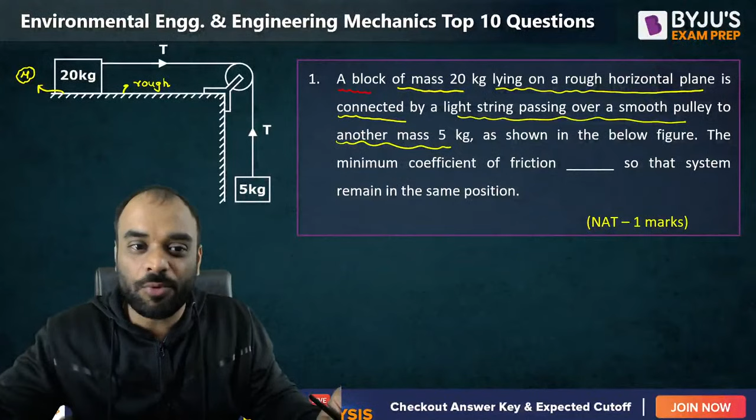That is the question, only 1 mark problem for this particular question guys. This is based upon the friction force and you need to draw the free body diagram for both the masses. Then only you are able to solve this type of problem. So let's do it guys quickly.

So this is the mass 5 kg for which we have to draw the free body diagram first. This is the 5 kg weight, so mg should act in the downward direction. Very nice Deepak. So 5 into, let us consider 10 as the gravitational constant. And T is nothing but our tension. So T is equal to how much? Can we write here, summation Fy is equal to 0, that is our static equilibrium equation. So T minus mg is equal to 0. So T is equal to 50 Newton. Correct? T is equal to 50 Newton.

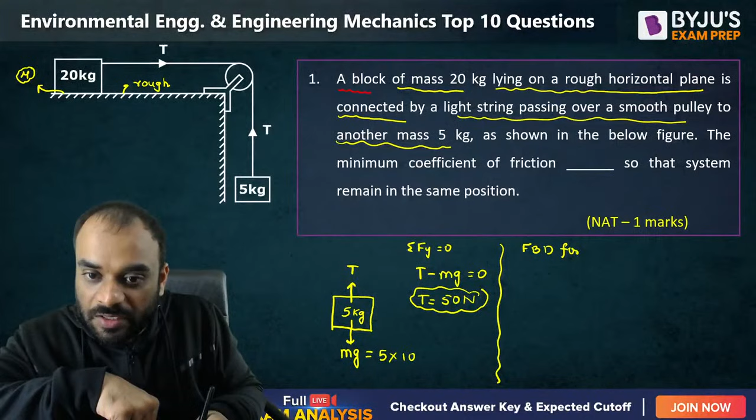Now guys, we need to draw the free body diagram for this particular 20 kg mass also. So FBD for 20 kg mass, let's draw it. So this is 20 kg. This is only a 1 mark question, the next one is 2 marks.

So it is equal to how much? 20 into again 10, and then we have a normal reaction like this, and this is our tension force. Now you know guys, the friction force will act in the backward direction because the block is trying to move in the rightward direction. That's why, very nice Rishabh Pant. So what will we write here? Summation Fy is equal to 0, and N minus 20 into 10 is equal to 0. So N is equal to how much? N is equal to 200 Newton. Correct? Okay, then we have to write summation Fx is equal to 0.

That means T minus Fr is equal to 0, so tension is equal to the friction force itself. Now the value of T is how much? We have already calculated it, 50. So 50 is equal to Fr, and Fr can be written as mu into N.

What is the value of N? It is 200, right? So mu into 200 is equal to 50. Kindly calculate this value of mu, how much it is coming around? 0.25. Very nice, it is coming around 0.25, and this is our answer.

So this is the minimum coefficient of friction which is required below 20 kg so that the system remains stable. Very nice guys, only 1 mark problem for this type of question. Okay, very nice Deepak, very nice Rishabh Pant.

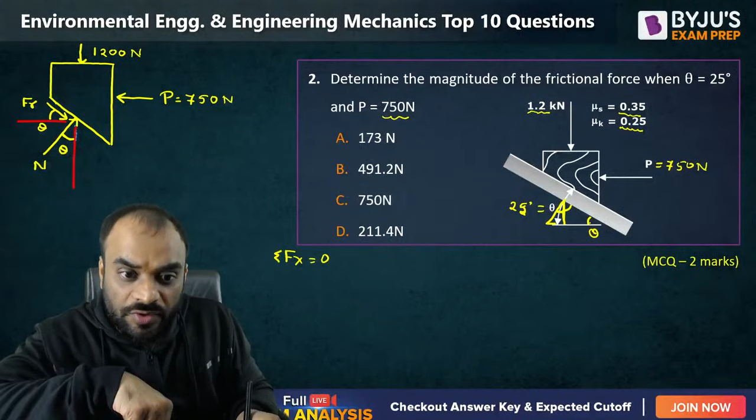Now guys, let's write down the equilibrium equation, static equilibrium equation. So summation Fx is equal to how much? It is equal to 0. So we can write here Fr cos 25 degrees - this angle is 25 basically, and this angle is also 25 degrees, correct? So Fr cos 25 degrees plus N sin 25 degrees minus P is equal to 0.

So what is the value of cos 25? Cos 25 degrees is equal to 0.9063. So 0.9063 Fr plus sin 25 - sin 25 is equal to 0.422 - 0.422 N, and it is equal to P. P is equal to 750 Newton. So this is our equation number 1, which we are getting.

Now similarly guys, we will write summation Fy is equal to 0. That means minus 1200 plus N cos 25 degrees minus Fr sin 25 degrees, which is equal to 0 again. So N cos 25, that means 0.9063 N minus FR. FR is equal to how much? We need to calculate it.

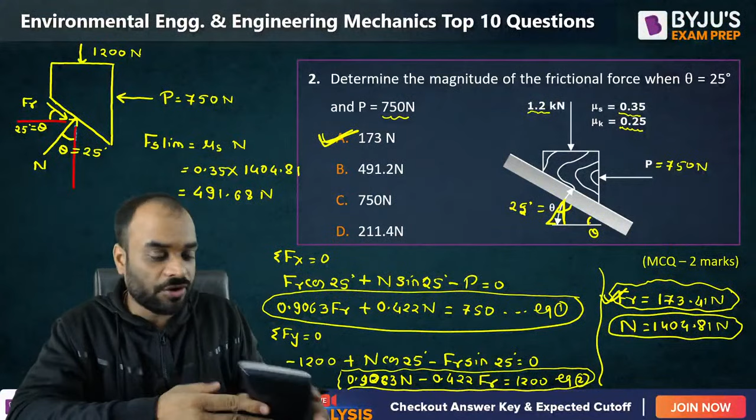Okay, let's move to the next question guys. Now this question is based upon environmental engineering. Only two questions were there for engineering mechanics. Now the remaining questions will be based upon the environmental engineering part. Kindly solve very carefully guys and read the question very carefully.

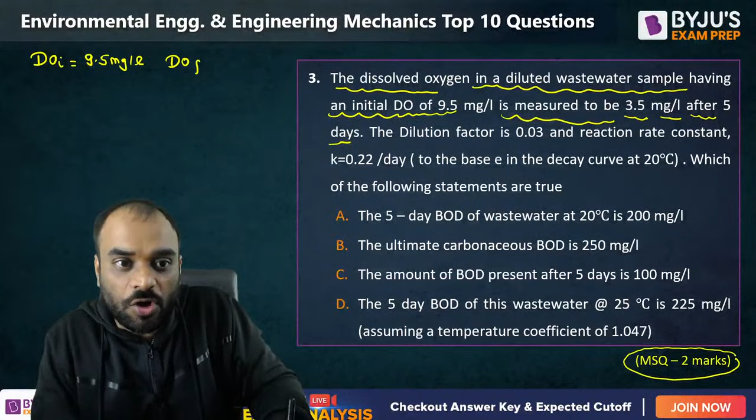And it is measured to be 3.5 milligram per liter after 5 days. That means DO final is equal to 3.5 milligram per liter. And a dilution factor is also given, which is 0.03. And the reaction rate constant is equal to 0.22, that means K value is given to us, which is equal to 0.22 per day.

Now what do we need to find? We need to find out whether these statements are correct or not. So the first statement says the 5-day BOD of the wastewater at 20 degrees centigrade is 200 milligram per liter. Let's check statement number 1. So BOD 5-day at 20 degrees centigrade can be written as DO initial minus DO final multiplied by dilution factor.

Now this dilution factor is given in terms of fraction, so you need to write 1 by 0.03. This is the dilution factor, this is DO value initial 9.5 minus 3.5 final value multiplied by 1 by 0.03. Please calculate this and let me know how much you're getting: 9.5 minus 3.5 divided by 0.03. So this value is coming around 200 milligram per liter.

200 milligram per liter. So can I say that guys, the first statement is correct? The 5-day BOD of the wastewater at 20 degrees centigrade is 200 milligram per liter. Yes, this statement is 100% correct.

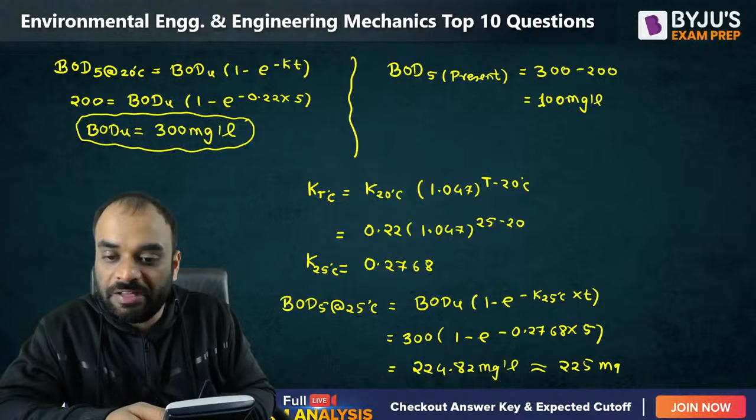So this value is coming around 224.82 milligram per liter, that means it is approximately equal to 225 milligram per liter, correct? So tell me guys, this answer is also correct. That means A is correct, C is correct, and D is correct. So 3 statements are correct, right? A, C, and D, and you will get 2 marks. Simple. Yes or no? Very nice, Swapnil. Correct answer. Very nice, very nice.

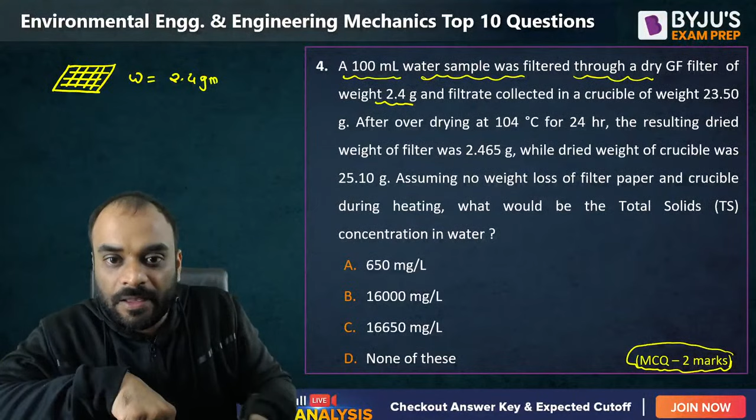By using gravimetric method. So guys, what is given to us? 100 ml of sample is there, which is filtered through a glass fiber filter whose weight is 2.4 gram. So there is a filter whose weight is already given. Let us consider this as W, and this value is 2.4 gram. And the filtrate is collected in a crucible whose weight is 23.50. There is a crucible also whose weight is, let us consider W star, equal to 23.50 gram. Now, after oven drying at 104 degrees centigrade for 24 hours, the resulting weight of filter was this.

Okay, so let us suppose 100 ml of sample you have poured, and over this, guys, some solid will retain.

Over to this, some solid will retain, right? Some solid will be there. Now after oven drying it for 24 hours at 104 degrees centigrade, what will happen? The moisture will get evaporated and ultimately you may have the weight of filter and the solid. Similarly, the weight of crucible and the solid, right? So that is given to us.

So let us consider the next part which is given to us: this filter, which is oven dry, and over it we have some solid whose weight is W plus W1. What is W1? That is the weight of suspended solid, because suspended solid will retain on the glass fiber filter. So this weight is given to us guys, how much it is? It is equal to 2.465 gram.

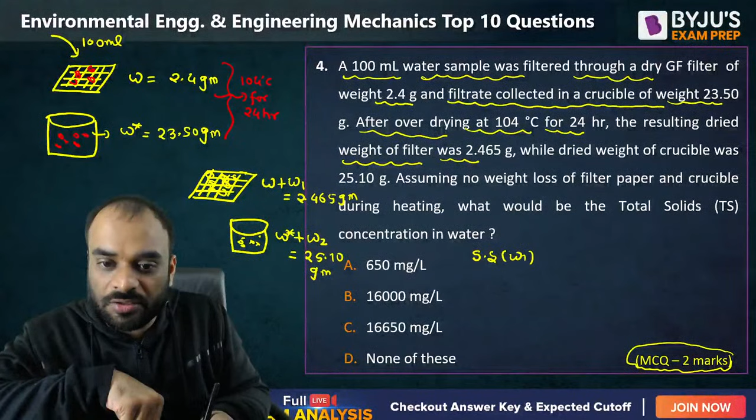The second one is crucible. So after oven drying, the weight of crucible and the weight of dissolved solid, the summation of it is equal to 25.10 gram. So can we calculate the suspended solid weight, which is nothing as W1? It is nothing as the subtraction of this part from this one. So 2.465 minus 2.4, how much it is? This value is 0.065 gram.

Second one is dissolved solid. The weight of dissolved solid is W2. W2 is equal to how much? 25.10 minus 23.50. So how much it is? This value is 1.6 gram.

Now after adding these two values, you are able to get the total solid concentration in terms of weight. So 0.065 plus 1.69, this value will be 1.755 gram. That is nothing as our total solid. Now we need to convert it in terms of milligram per liter. So do it guys, you will get the answer.

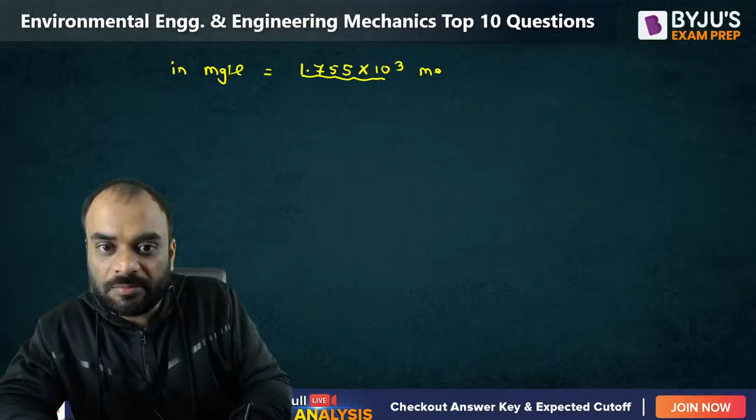So in milligram per liter, we can write this 1.755 multiplied by 10 raised to power 3, so that it is converted into milligram, right? And divided by liter. Volume is how much? 100 ml. So 100 divided by 1000.

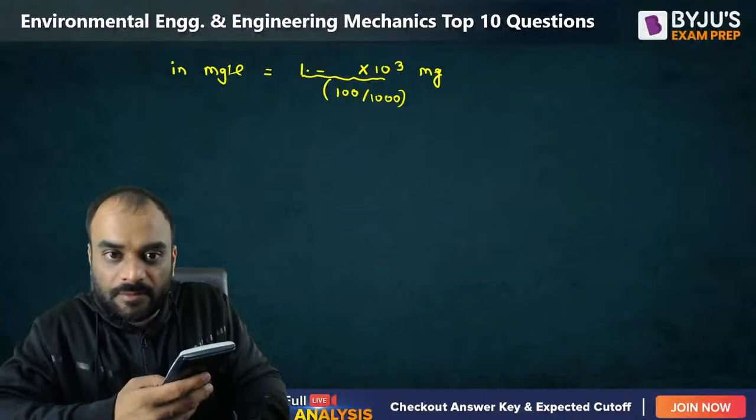25.10 minus 23.50, so this value is 1.60. Sorry, let me redo this: 1.60 plus 0.065. Okay, so this value is basically 1.665. Okay Rishabh, 1.665, if you solve this, how much you are getting?

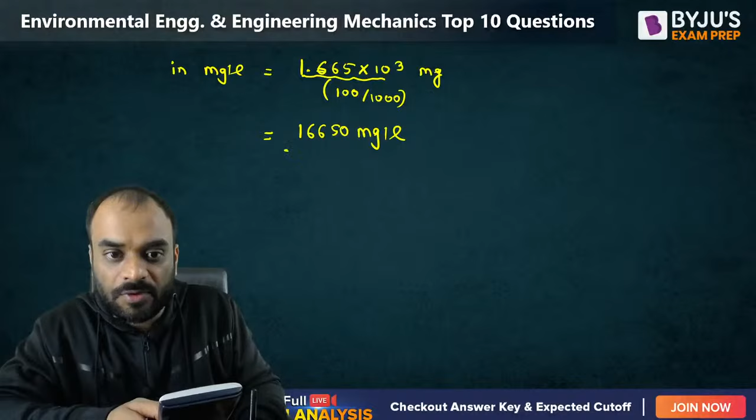So guys, this value is coming around 16650 milligram per liter, right? So our answer will be C. C is the correct answer for the problem. So in this way, we are able to calculate the total amount of solid which is present in the water. Crystal clear, guys? Very nice, very nice. C is the correct answer for the problem. Very nice, Rishabh. Very nice, Swapnil. Padma, yes, 1.665 is the correct answer.

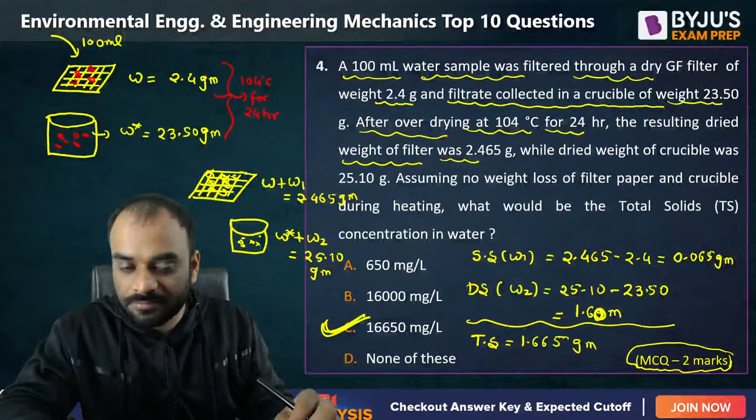Okay, let's move to the next question, guys. Now this question is based upon municipal solid waste. Again, it is related to the filtration process, but in this case, we need to calculate two different things: one is moisture content and second one is our ash percentage. Okay, let's understand the question.

During proximate analysis of municipal solid waste, 50 gram of sample is oven dry for 24 hours at 104 degrees centigrade. So we have a sample whose weight is equal to 50 gram, right? And it is placed in the oven at 104 degrees centigrade for 24 hours. This is the weight of sample right now. In this weight, the weight of crucible is not included. We have to include it.

After cooling down, a residue weight along with the crucible was observed as 21.246. That means the weight of residual and the weight of crucible combined is given to us after oven drying it, 21.246 gram, right? Then the residue was again subjected to 550 degrees centigrade for 2 hours. The crucible was again weighed and obtained 21.021 gram. Okay, we will consider this.

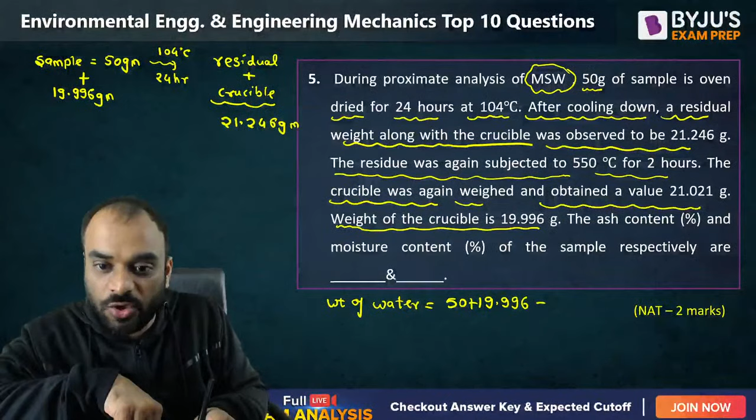So first, let's calculate the moisture content. Can I say that the weight of the water is equal to how much? Weight of water is equal to how much? Bachcha log, it is 50 plus this particular weight, which is 19.996, minus this value, which is 21.246, correct? So if you calculate this particular value, how much it is?

So this value is coming around 48.75 gram. That is the weight of water. Now the total weight of the sample is 50 gram. So can I calculate the percentage moisture?

What is the percentage moisture? 48.75 divided by 50 multiplied by 100. In this way, we are able to calculate the percentage moisture easily. So tell me guys, how much is it? 97.5% is the percentage moisture.

But we need to find out the percentage ash also. This is the residue and the crucible weight after oven drying. Now the same sample is placed inside a muffle furnace at 550 degrees centigrade for 2 hours. Now what will happen guys? From this particular residue, some of the volatile solids may get evaporated. Now the remaining part will be our ash, and the final weight is 21.021 gram.

So let's calculate the weight of ash also. Weight of ash is equal to this value minus this one: 21.246 minus 21.021. Please calculate how much it is. This value is 0.225 gram as the weight of ash.

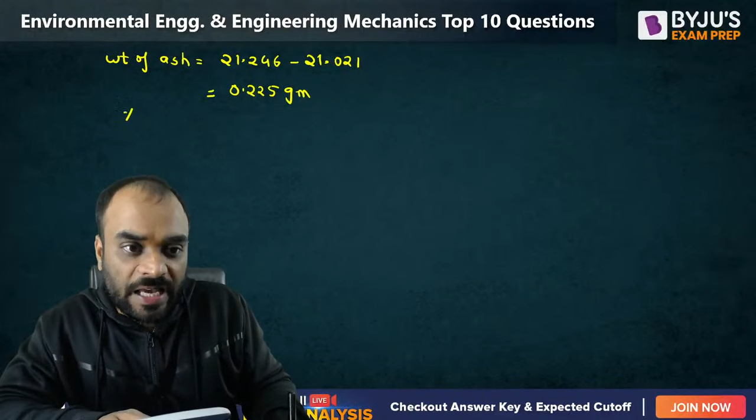So let's calculate the percentage ash, which will be 0.225 divided by total weight of sample, which is 50, multiplied by 100. In this way, you can calculate the percentage ash. So guys, the percentage ash is 0.45% only.

97.5% is the percentage of moisture. Crystal clear or not? Please write down in the chat box, all of you. Getting it? Tell me guys.

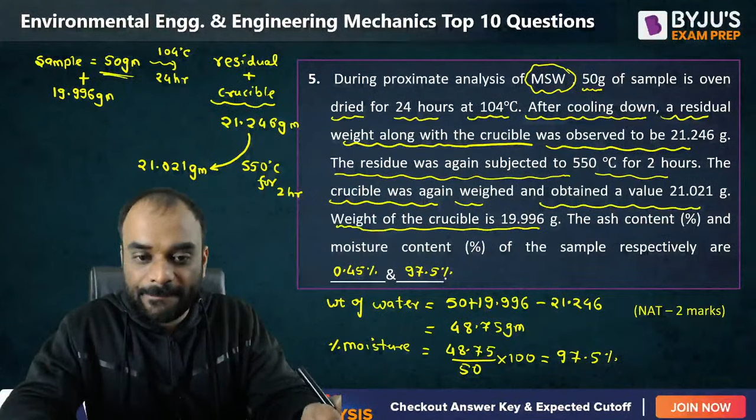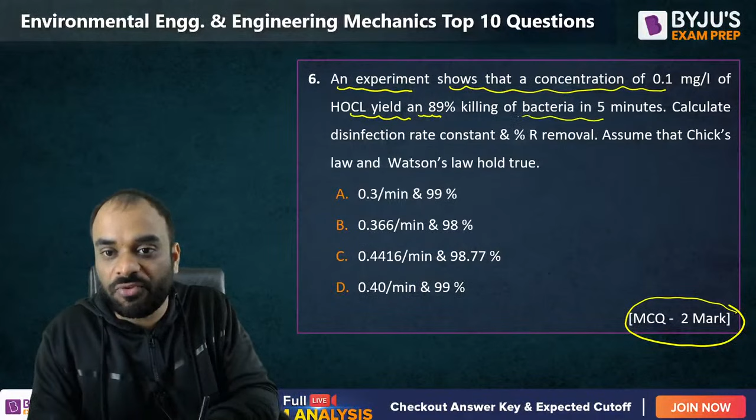Okay, very nice. Next question is based upon the disinfection part. A very different type of question guys, which we have to solve again, and it is basically an MCQ, a 2-mark problem. Listen very carefully. An experiment shows a concentration of 0.1 milligram per liter of HOCl which yields 89% killing of bacteria in 5 minutes. Now calculate the disinfection rate constant and percentage R removal, assuming Chick's law and Watson law hold true. So guys, you know what Chick's law is?

Chick's law is nothing but NT is equal to N naught into e raised to power minus K into T. What is NT? NT is the number of microorganisms present after time T. What is N naught? Initial number of microorganisms. What is K? Disinfection rate constant. What is T? Time of contact.

Getting a point? Now, as per this question, 89% of microorganisms are already killed. So how many percent of microorganisms are remaining? 11%. So if it is 11%, can I say that after time T, 0.11 N naught is present after 5 minutes?

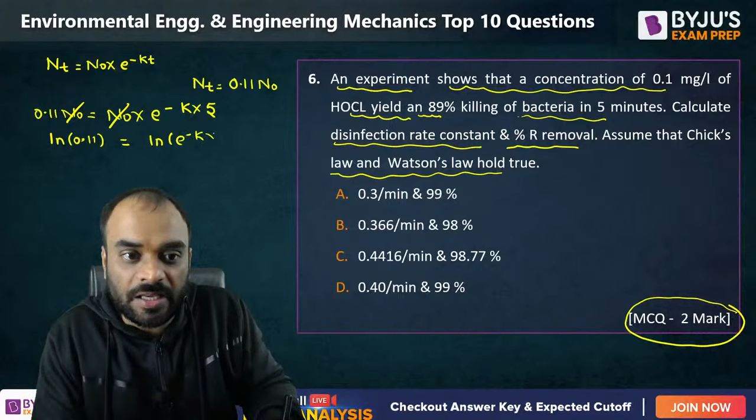So we will put the value of NT: 0.11 N naught is equal to N naught into e raised to power minus K into T. K value is not given to us, we need to find it out. T is equal to 5 minutes, it is already written. So let's cancel N naught and take ln on both sides: ln 0.11 equals ln e raised to power minus K into 5. Okay, let's solve it.

Minus 2.2072 is equal to minus 5K. So K is equal to how much? K is equal to 0.4414 per minute, and this is one of the answers which we need. So you can see guys, this is the only option which can be correct.

But let's solve the second part also, that is the percentage R removal. What do you know about percentage R removal? Percentage R removal means how much percentage of microorganism...

Calculate the disinfection rate constant and the percentage R removal after 10 minutes. Kindly consider 10 minutes - this statement is missing: after 10 minutes of contact period. Kindly consider this statement. You need to find out how much percentage R removal there is.

So guys, to calculate this part, we need to calculate the number of microorganisms present after time 10 minutes. So N naught multiplied by e raised to power minus K, K is equal to 0.4416, we'll consider it, multiplied by 10.

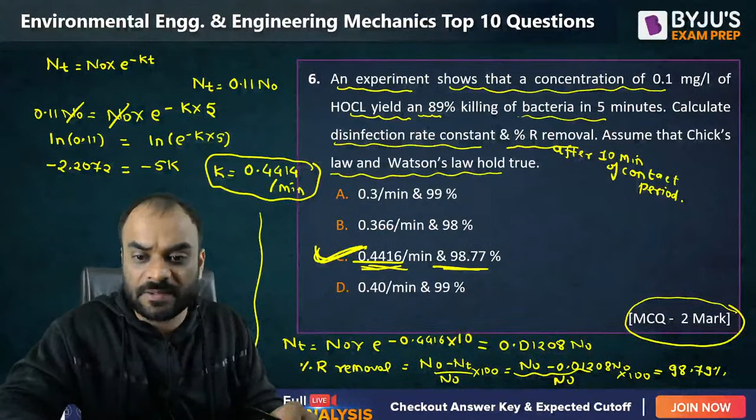0.01208 N naught divided by N naught, multiply by 100. So you will get 98.79% something. That means C is the correct answer, which is the closest one. C is the correct answer for this particular problem. And this particular problem is based upon Chick's law.

Next question. Now again, this is an MCQ type question in which you need to find out the theoretical oxygen demand for a chemical, which is basically benzoic acid. Let's understand how we can solve it.

So this is the reaction which is already given to us. We need to find out the theoretical oxygen demand, which is known as COD also. If the data is not given, we will consider the theoretical oxygen demand equal to chemical oxygen demand also. So in this case, we need to find out the theoretical oxygen demand for benzoic acid whose concentration is 370 milligram per liter. Let's understand how we can solve this problem.

So 2 times of C6H5COOH require 15 molecules of O2. Let's calculate this particular value first. What is the molecular weight of this? So carbon is 12, 12 into 6, plus hydrogen is 1, 1 into 5, carbon is 12 again, oxygen, oxygen, that means 16 plus 16 plus 1. Let's calculate this particular value first, how much it is.

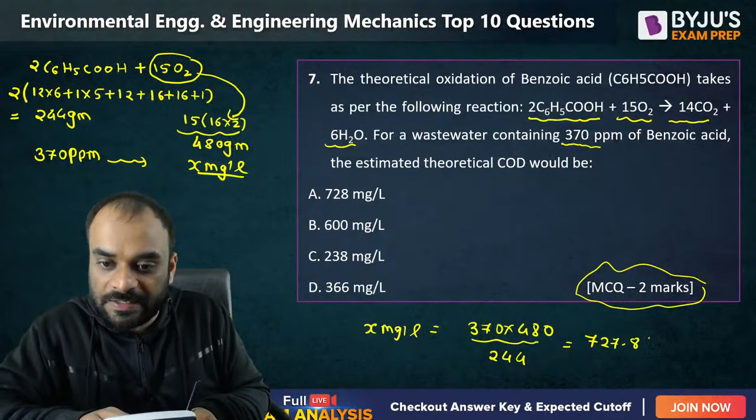So 370 multiplied by 480 divided by 244. So exactly we are getting 727.86 milligram per liter as an answer. That means 728 can be the answer. Very nice, Rishabh. Deepak, correct.

Next question, guys. Again a 2-mark question, which is based upon municipal solid waste. What is this question exactly? Let's understand. Determine the number of 7.5 meter cube containers which is required per week for the waste collection after the compaction, for a colony with 200 houses and 3 people per house. The generation rate is 0.6 kg per person per day. The compacted specific weight is 250 kg per meter cube.

So first of all, you need to calculate the amount of MSW generated per week. First, we need to calculate this.

What is the amount of municipal solid waste which is generated per week by the colony? So how many houses are there? 200. How many people are there per house? 3. What is the generation rate? 0.6 per day, but we need to multiply it by 7, so that it will be calculated in terms of per week. So 200 multiplied by 3, multiplied by 0.6, multiplied by 7. So this value is 2520 kg per week.

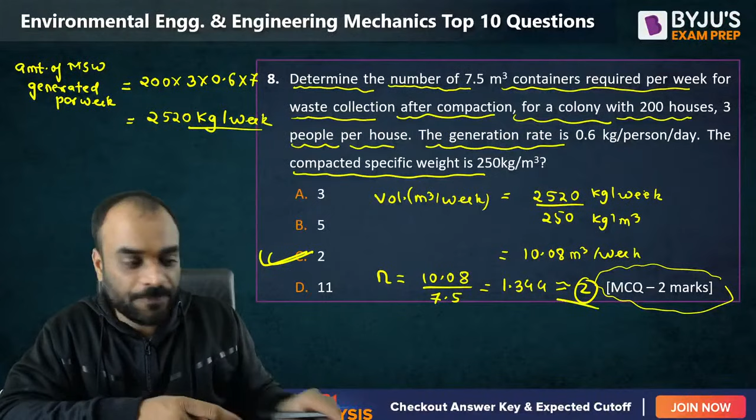So guys, if you divide this value by 7.5, you are able to calculate the number of containers which is required. So 10.08 divided by 7.5, we know that it is equal to 1.344. So you need to round it off, so it will be 2. So C is the correct answer. Very nice, Swapnil, Rishabh, very nice guys.

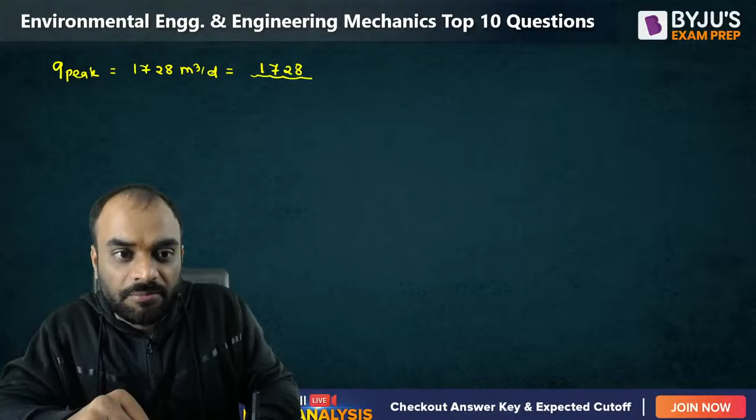So guys, what we will do first, let's convert the value of peak discharge into meter cube per second. This value given to us is 1728 meter cube per day. 1728 divided by 24 and 3600 - please calculate this, how much it is. Okay guys, so how much we are getting? 0.02 meter cube per second. This is our peak discharge.

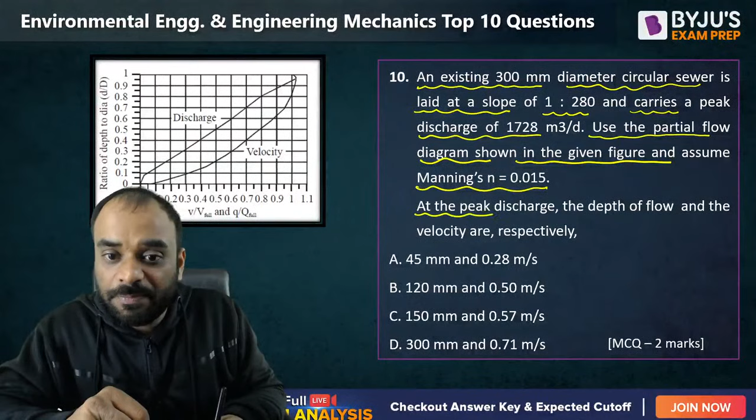Now use the partial flow diagram in the given figure and assume n is equal to this. At the peak discharge, the depth of flow and the velocity - we need to calculate the value of depth of flow, how much it is, and the velocity, how much it is at the peak discharge.

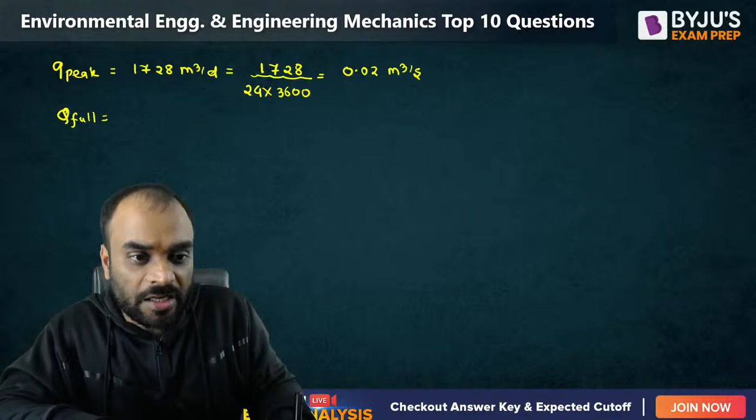We know the value of peak discharge, but guys, let's calculate the Q full also. Q full can be written as V full multiplied by A full. V full is 1 by n, r raised to power 2 by 3, s raised to power 1 by 2, and A full is pi by 4 into d square. Clear? So let's calculate the value of Q full first.

1 by n, n is equal to 0.015, which is already given. R is equal to how much? R is nothing but your hydraulic radius. So for full run, how much it is? R is equal to wetted area upon wetted perimeter.

Wetted area is equal to pi by 4 into d square, divided by pi d. So this value will be equal to - pi to pi will cancel, it will become d by 4, right? So this value is d by 4. D is equal to 300 mm, so 300 divided by 4, raised to power 2 by 3.

Slope is given to us as 1 is to 280, so 1 by 280 is the slope, raised to power 1 by 2. Then pi by 4 and again 300 square. But guys, if we put 300, we will not get our discharge in meter cube per second. So in place of 300, you can write 0.3, that will be much better. Please convert the value in terms of meter directly, you will get the answer properly. Do this calculation, how much you are getting? Let me know the answer of this particular part first.

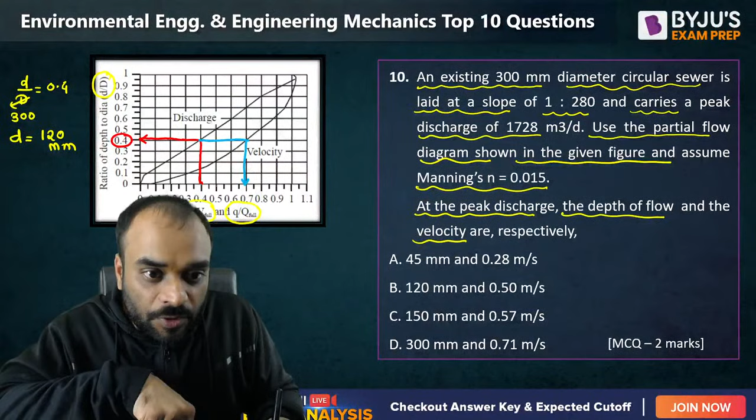120 mm, correct? Now what you will do, guys, to calculate the velocity, you need to project this particular point further on the velocity graph and kindly project it on the x-axis. So this is 0.4, this is 0.5, this is 0.6, this will be 0.7. So what we are getting? V by V full is equal to 0.7.

Clear? Now let's calculate the value of velocity when we have peak discharge. So V is equal to 0.7 multiplied by V full. V full is equal to 1 by n, r raised to power 2 by 3, and s raised to power 1 by 2. So 0.7 multiply by 1 by n, n is equal to 0.015, r is equal to d by 4, that means 0.3 divided by 4, raised to power 2 by 3, and slope is 1 by 280, raised to power 1 by 2. Kindly calculate it, you will get the correct answer for this.

So guys, we are getting a value of 0.4959, that is approximately equal to 0.5 meter per second. That means this is the correct combination. At peak discharge, the depth of flow is 120 mm and the velocity is 0.5 meter per second. And that's why B is the correct answer for this particular problem.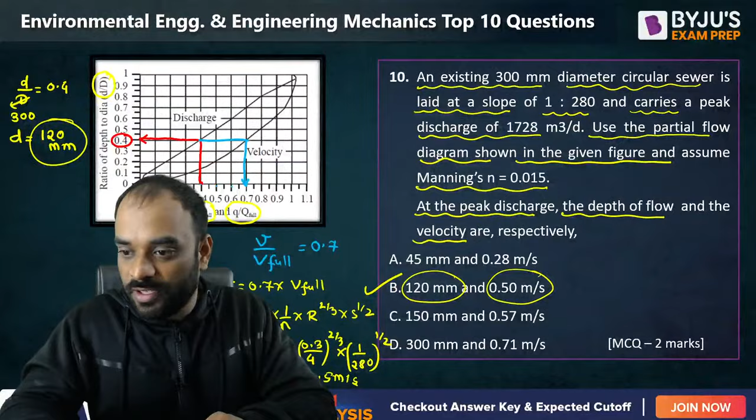So kindly join that session at 9 p.m. Okay, so any doubt if you have, guys, any query, any question, anything which you want to ask before the GATE exam, you can ask me right now. I'm here to help you, right? You can ask me anything.